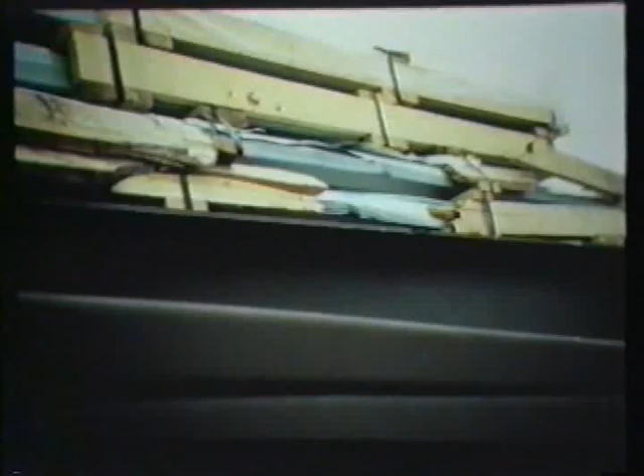...will indicate the materials were received in a satisfactory condition. If there is concealed damage, save the damaged articles, including all packing material. Notify the delivering carrier immediately. Double-check each load. Finding that materials are missing or damaged once erection is underway is a costly proposition.

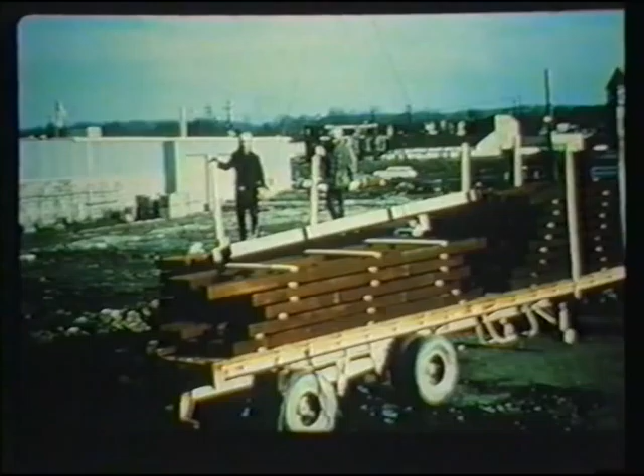Unloading materials is the first step in the actual erection of the building. Always have the proper equipment on hand when unloading. The site conditions, space to maneuver, nature of the materials to be unloaded, and other related factors will determine the type of equipment best suited to the situation. Ordinarily, unloading is done by cranes. Under the right circumstances, however, forklifts may be more practical and economical.

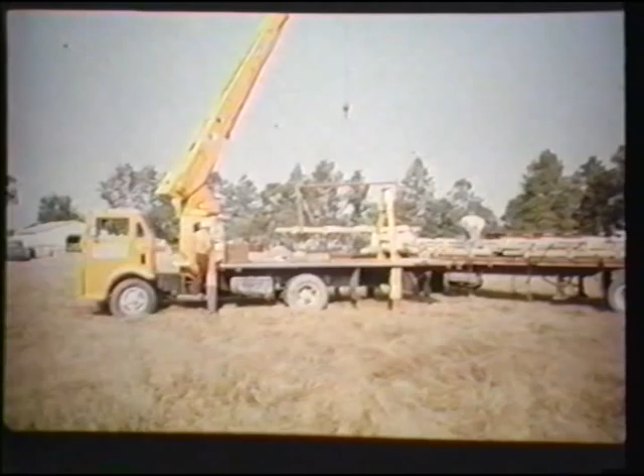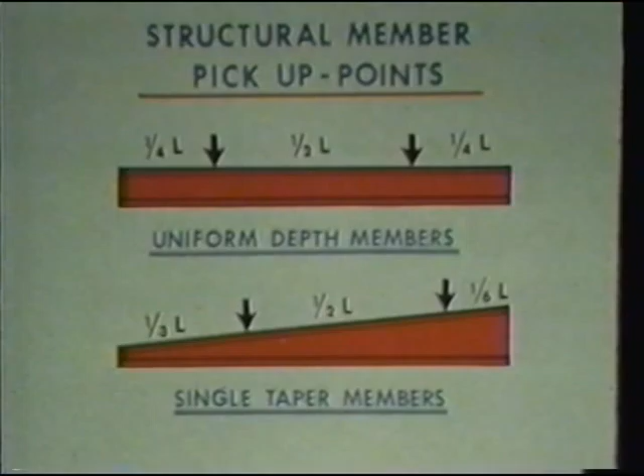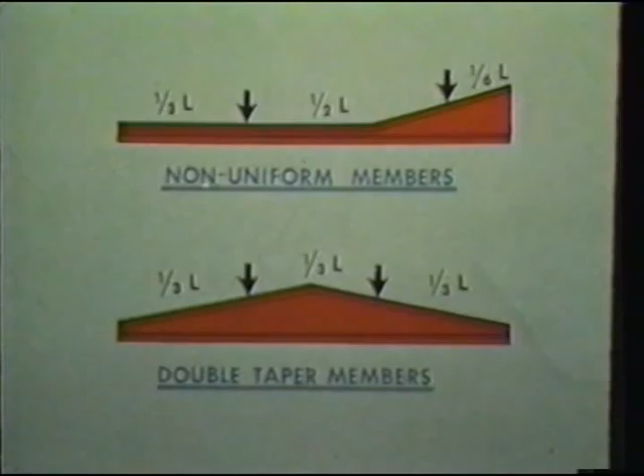One piece of equipment essential to unloading sheeting is the spreader bar. With either a forklift or crane, the spreader bar reduces the possibility of buckling long sheets as they are being lifted. When lifting sheeting, pickup points should also be protected so that the edges of the panels won't be damaged. Chokers, slings, clamps, or shakeout hooks are normally used to unload primary and secondary structural steel. The unloading equipment should be positioned at the pickup or balance points of the load to be hoisted. The weight and shape of the load determines pickup points.

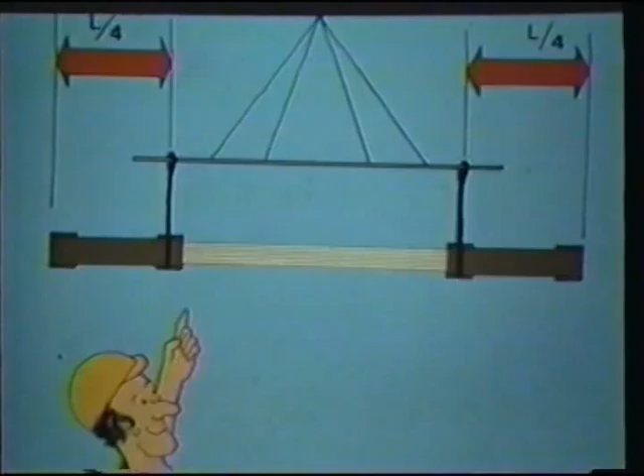Never pick up a panel bundle at its extreme ends. This can severely damage the major panel ribs. A belt or protected edge should be used to avoid damaging the panels. Always pick up panel bundles at the designated pickup points and position the slings around the sideboards. Remember, damaged parts cause delays. Unload all materials carefully. Do not drop, but rather lower them slowly to the ground.

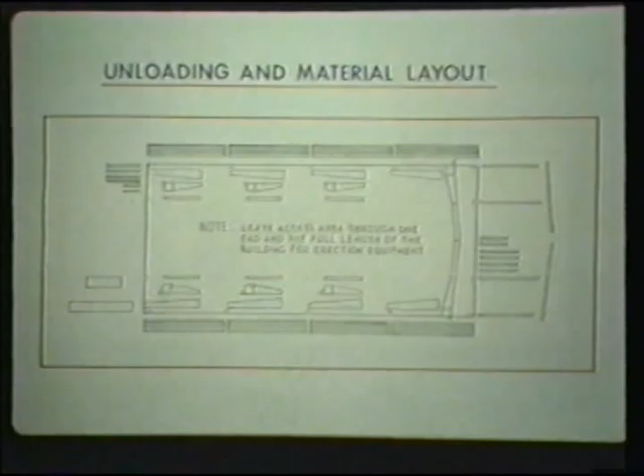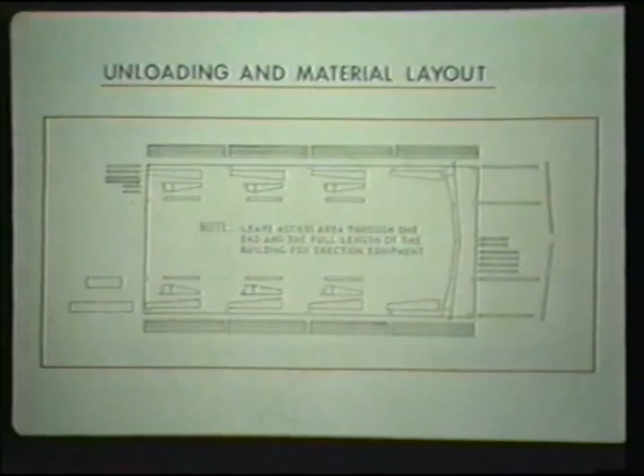A good job of planning the unloading sequence and material layout scheme will eliminate extra crane moves, extra handling of material, much wasted time, and possible damage to material. Give the crew a sketch of the placement locations and/or storage areas for the structural members, panel, trim, bolts, hardware, and insulation prior to unloading. There are two basic unloading techniques. One is unload and store. The other is unload and erect.

If the erection process is going to be delayed, building materials must be properly stored so that they won't be damaged. Ground storage structural components are subject to moisture and dirt. Since structural steel is usually primed with only a shop coat, it might have to be cleaned and repainted at great cost. All materials should be placed on blocks. This will also help assembling materials and attaching them to lifting apparatus.

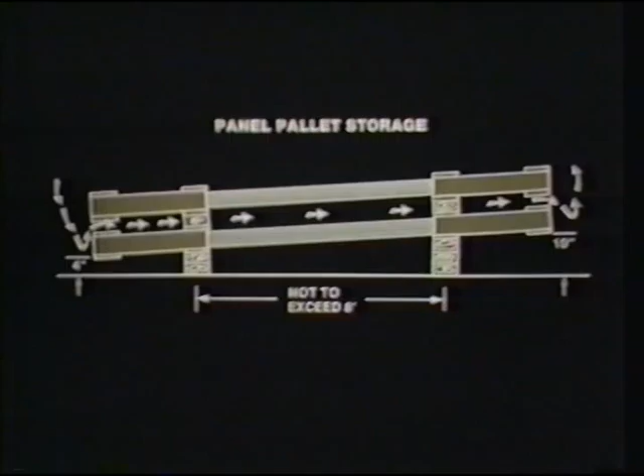Even greater care must be taken to protect sheeting and trim that are stored. When storing sheeting, one end of the bundle should be elevated at least 3 to 4 inches off the ground. Sheet bundles should be placed above the terrain so that air can circulate from both ends. Proper storage does not ensure moisture prevention alone. Inspection and appropriate action is the best insurance to avoid damage from moisture corrosion.

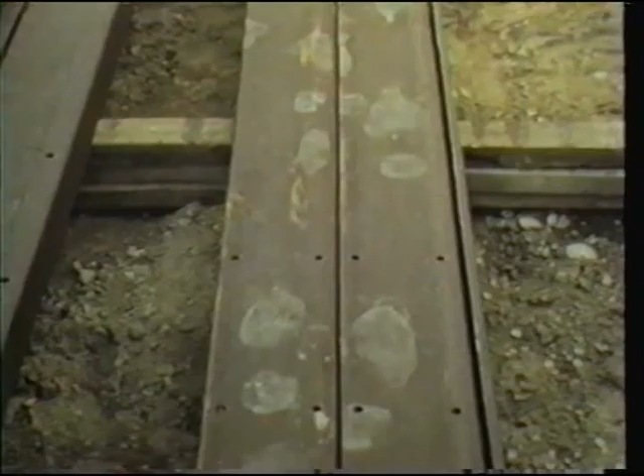Care must be taken when storing and handling insulation materials so that the facing doesn't become damaged and the fibers begin to deteriorate. Keep the material packaged and covered with a tarp until it is erected. No one should be allowed to walk on material stored on the ground. Time spent cleaning soiled materials could be better spent on erection.

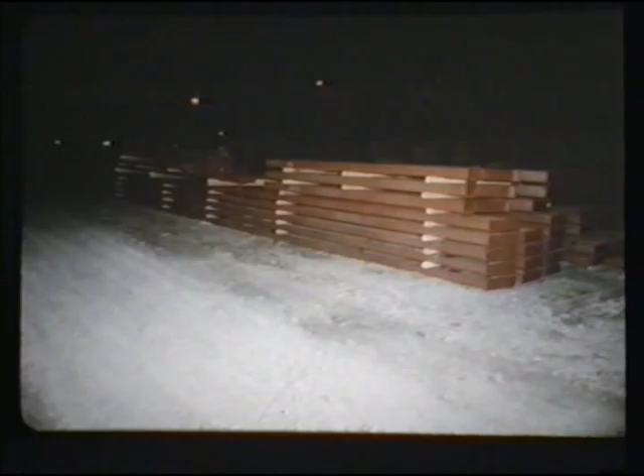Job site theft is costly and irritating. Small tools, erection materials, and hardware should be locked up when they aren't being used in a field warehouse or storage vehicle. Larger items can be protected within a lighted area. A watchman might also be inexpensive insurance.

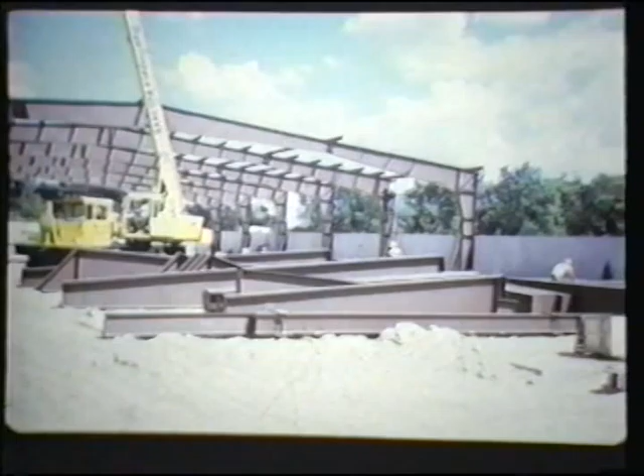If the erection of the building is to start immediately after unloading, the primary structural steel should be laid out for easy pre-assembly and setting. When possible, leave an access area throughout the full length of the building so material will not have to be handled more than once. Many erectors know that a man on the ground can work twice as efficiently as a man working in the air.

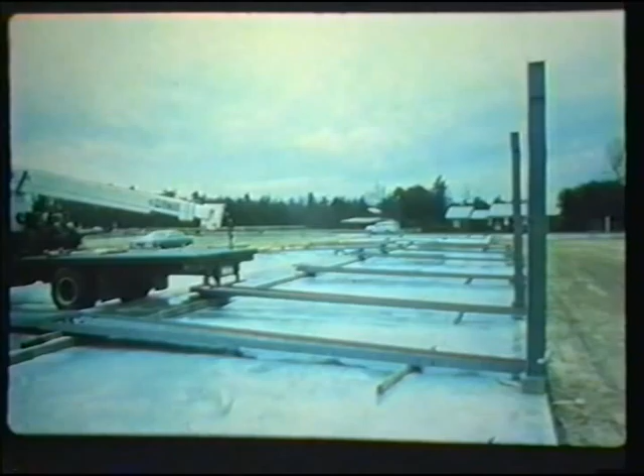It will help the builder if he can assemble as many components as possible that can be handled safely while they are on the ground. For a relatively small structure, the builder may want to erect it immediately upon unloading with a minimum amount of pre-assembly.

This can minimize the amount of time a rented crane is needed on the job. It may be cheaper on smaller jobs to assemble smaller parts after rather than before the erection of the primary structurals.

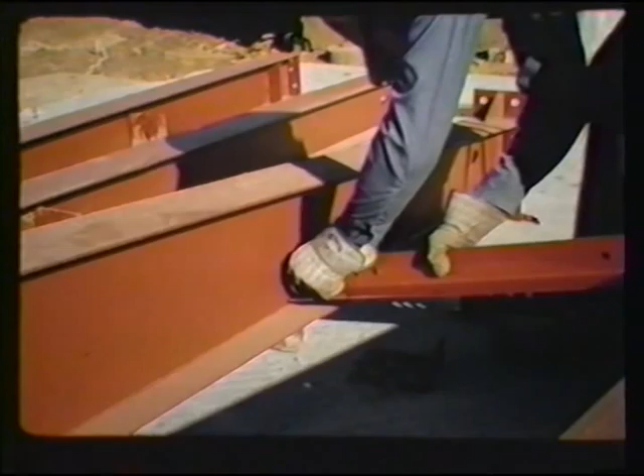Pre-assemble everything possible on the ground. Ground pre-assembly is safer and takes a lot less of the crew's energy. Columns can be pre-assembled with clips, brace angles, and other miscellaneous connections. The builder will have to decide on how much pre-assembling can be done depending on the size and type of job. Rafter sections can be bolted up as they are laid out for picking.

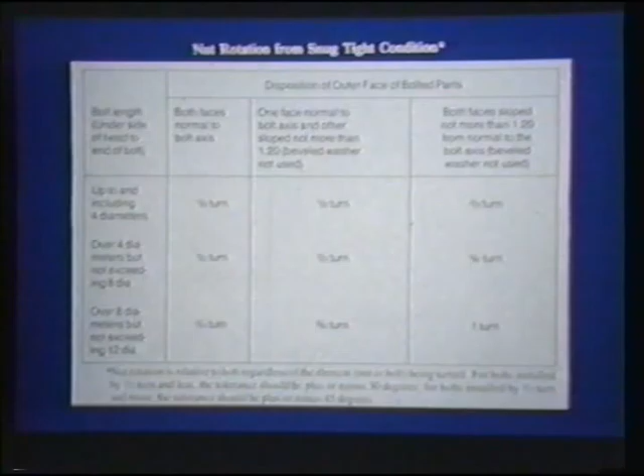All splice bolts should be installed and tightened under unstrained conditions. Make sure all pre-installed high-strength splice bolts are properly tightened before the structural sections are hoisted. Connection bolts for miscellaneous materials need only be finger tightened in pre-assembly. All bolts, however, should be fully tightened upon completion of each connection. Always follow the manufacturer's specification for bolt tightening.

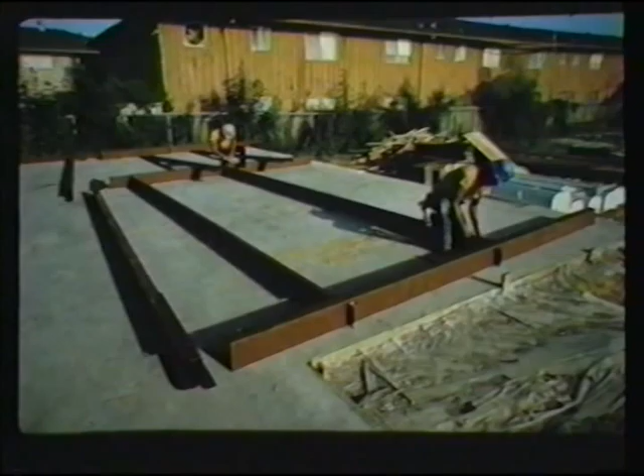Flange brace angles also can be loosely bolted to the rafter sections while they are on the ground. Post and beam end wall materials can be laid out at each end of the building. They can be fully or partially pre-assembled for tilting up into place as a unit or unit sections.

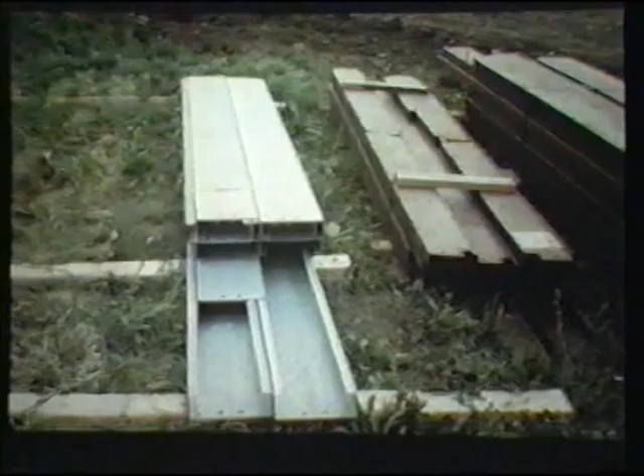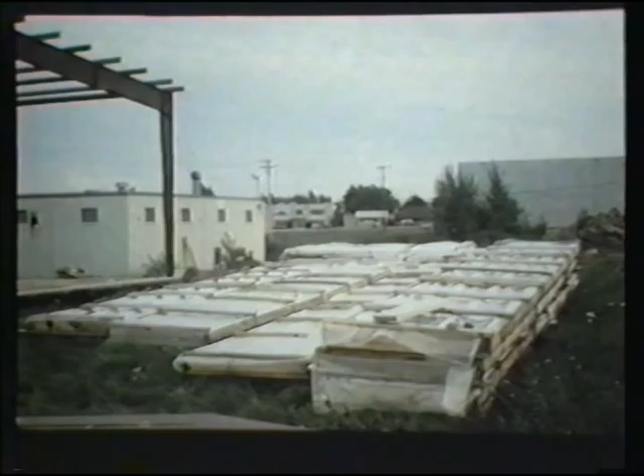Girts, purlins, eave struts, and door jambs should be broken out and divided along both sides of the building according to the requirements of each bay and rebundled if necessary for handling. Panel bundles, trim, and related components should be spotted outside the foundation perimeter for erection later. Shake out wall and roof rods in their respective bays. Run the nuts down, then back them off to clean the rod threads. Pre-assembling nuts, bolts, and washers can also save time later.

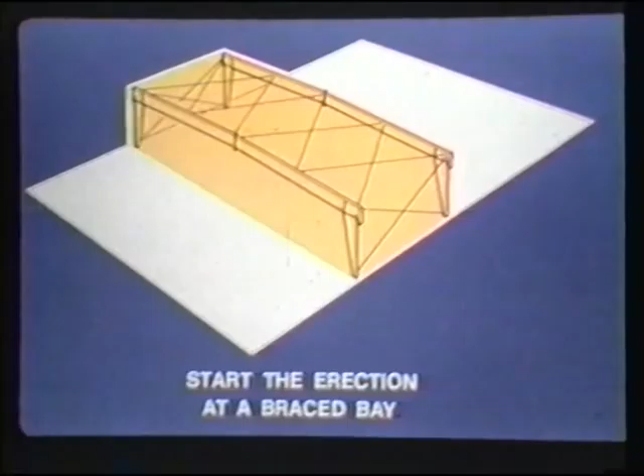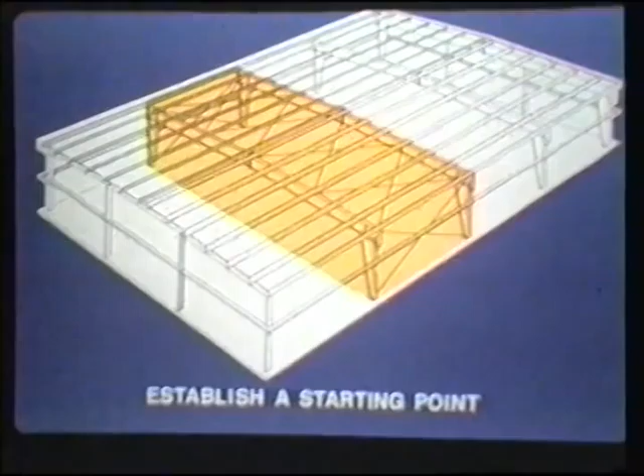Structural steel, Section 5. Safe and efficient structural steel erection begins with the first braced bay. MBMA strongly suggests that when possible, the first bay be completed from sidewall to sidewall before erection continues on the remaining framework, except for extremely wide buildings or where impractical. That includes primary frames, purlins, and eave struts, and loosened permanent rod bracing.

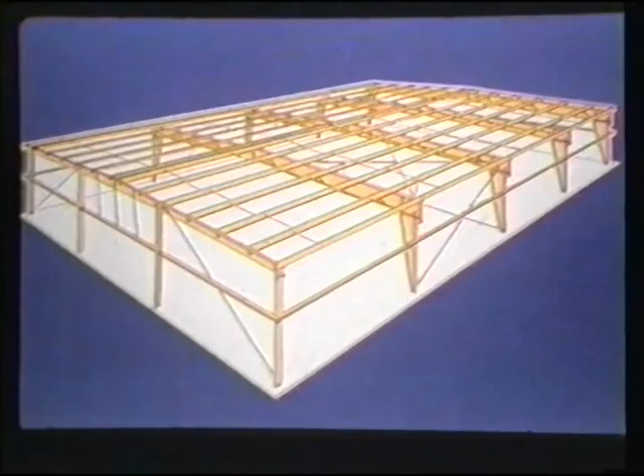The framework should be adequately braced with properly anchored construction tie-offs. Further, it is mandatory that the builder adequately stabilize all erected components until the entire structural shell, including the sheeting, is complete. Nearly all construction phase failures can be attributed to inadequate construction bracing.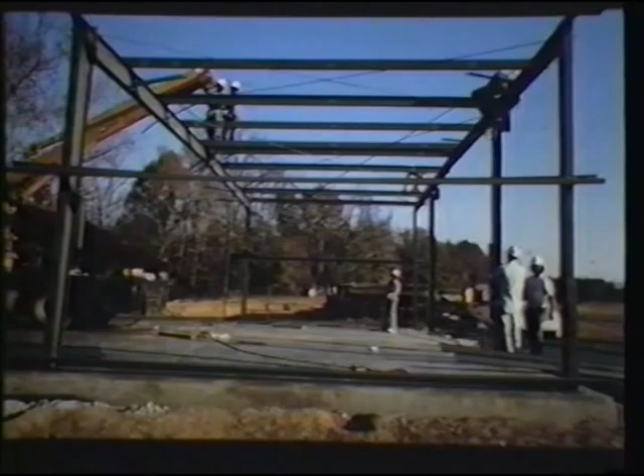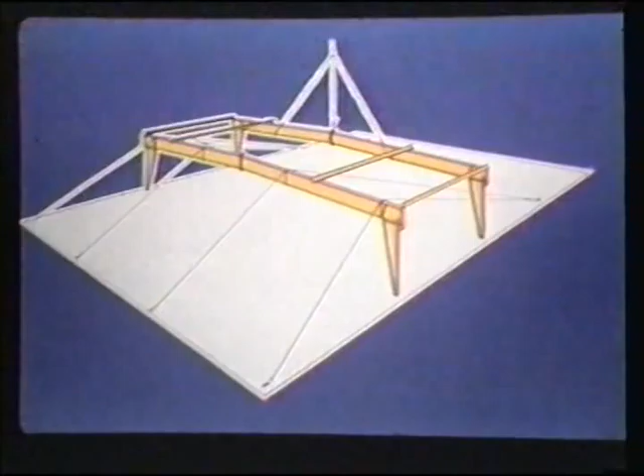Once the frames for the first braced bay are set and cable braced, all of the secondary structurals should be installed. Once the purlins and eave struts are tied in, any permanent roof and wall bracing should be installed in a loosened condition. All temporary construction bracing must still remain in place and tight. Secondary structural connections should not be tightened until the first bay has been plumbed and aligned. Necessary alignment adjustments may be made by tightening or loosening the temporary cable bracing.

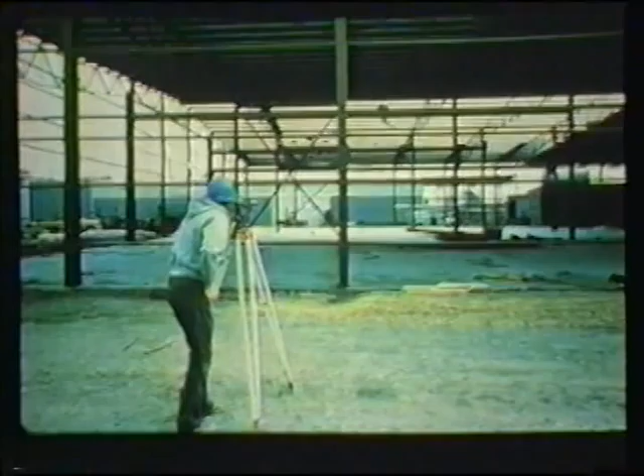After the bay is completely plumbed and aligned, the secondary structural connections may be tightened to specification, along with the permanent rod bracing and the anchor bolts. Permanent rod bracing is not recommended as temporary construction bracing or for purposes of plumbing. The quickest way to align a building is to plumb the first bay erected. Then make periodic alignment checks and adjustments throughout the balance of the structural system based on this benchmark bay. This will make all succeeding connections easier.

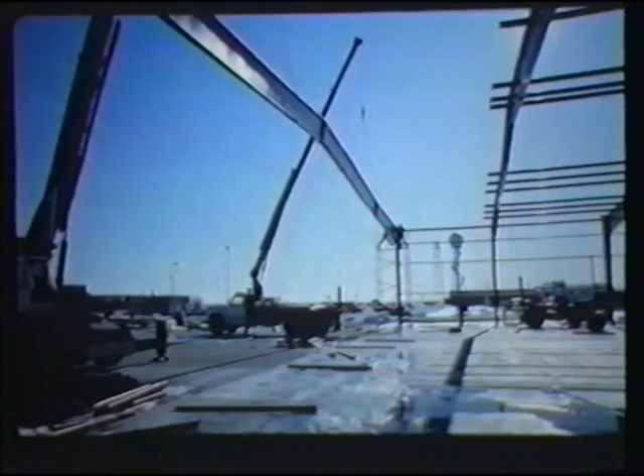Plumb is defined as a variance not to exceed L/300. There are several accepted plumbing methods. Use a transit to achieve the greatest accuracy. After the first braced bay is completed and plumbed, the builder may continue with the erection of the remainder of the structure. Again, the temporary construction bracing should still be in place and tight in the first bay.

MBMA recommends that all purlins be installed as the building progresses. This diagram reviews the initial steps of metal building erection. 1. The first interior frame is set with temporary tie-offs, shown with blue lines, in place. 2. The second frame, in this case the end wall, is fully erected with construction bracing, again shown with blue lines, in place. 3. All of the secondary roof and wall structure is installed.

4. Permanent rod bracing, if required, is loosely installed. 5. The first bay is plumbed and aligned with all connection bolts tight and permanent rod bracing, if any, snugged down. Do not tighten the rods too much. It may not be possible to pull all the sag out, especially with larger rods.

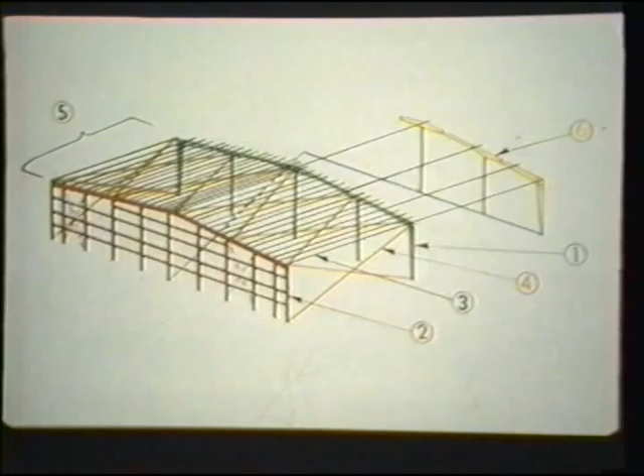6. Erection of succeeding frame lines continues with the same procedures as described before. In order to reduce the number of lateral crane moves, it may be practical to continue with the erection of one half of the structure for the entire length of the building. Then, work back down the opposite side in the same prescribed manner to finish off each frame line. This method is fully acceptable as long as adequate temporary bracing is used throughout the length of your erection path.

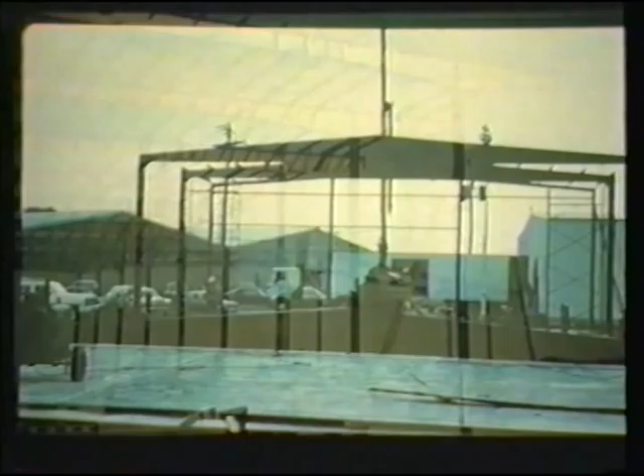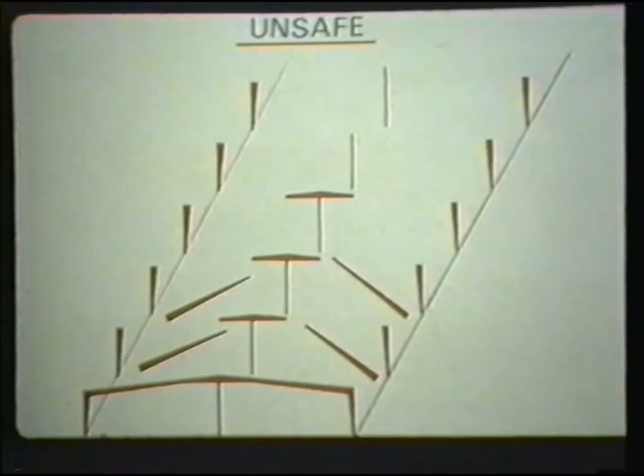Once the first bay is erected, braced, plumbed, and bolted up, it becomes the basis for erecting the remaining frames. Set all columns you can reach without moving the crane, but only for those frames which can be completed or braced during the current day's work. Freestanding columns are hazardous since they can be blown over by a gust of wind. Put washers and nuts on the anchor bolts, but do not yet tighten more than finger tight.

If 2 cranes are needed for erection, it is suggested to have one at the site ahead of the other to shake out the material. If 2 crews are required, the second crew can be kept busy by following up the main erection sequence with the distribution and bolt-up of fill-in materials.

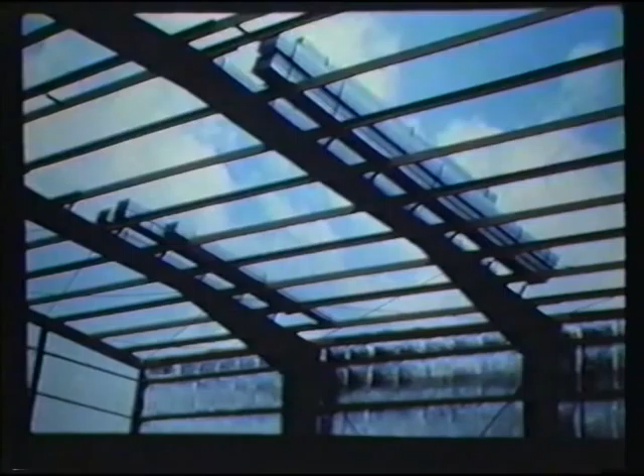When all purlins are filled in as erection of the frame lines progresses, the roof bundles can be spotted above the framework, if the roof slope permits, normally under 2 and 12. This can save valuable time during sheeting erection. It also reduces the crane time. A wide multi-span frame structure will require additional men to follow up the main erection sequence with the installation and bolt-up of fill-in materials in order to keep pace with the main framing.

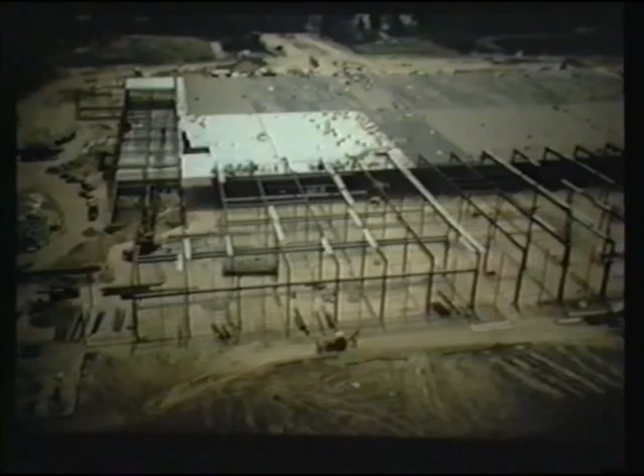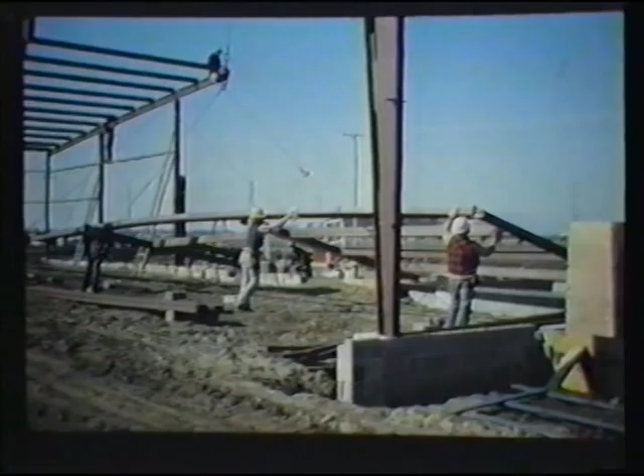Also, if roof slope permits, plan to spot the roof panel bundles as structural steel erection continues. The crane may not have enough reach to properly place the bundles later. When placing roof panel bundles on the structure, make sure they are spotted over the primary rafter sections with purlins blocked to avoid structural damage to the unbraced light gauge purlin members. These operations should be repeated over the entire length of the building. The remaining end wall is raised by the methods described earlier.

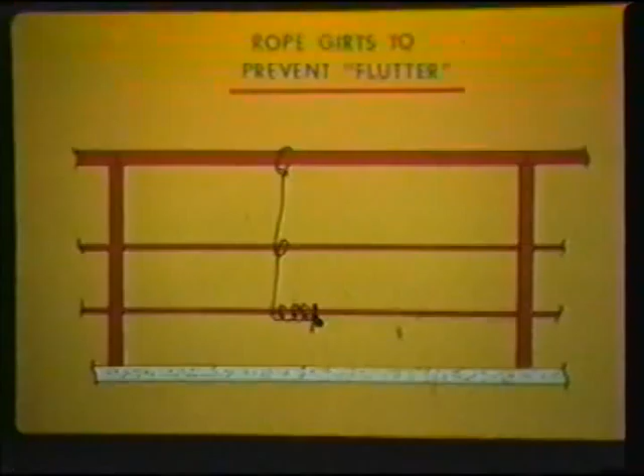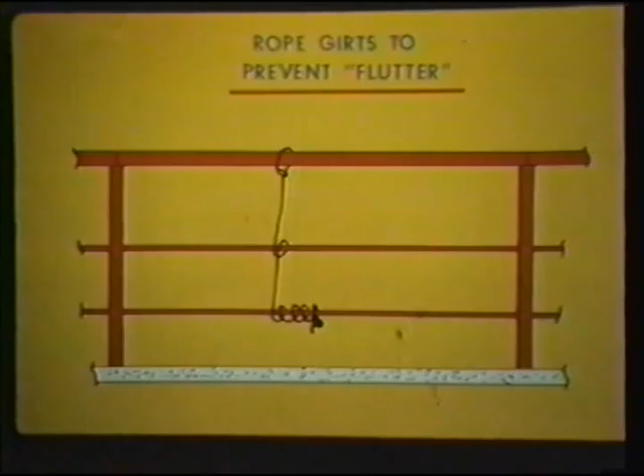If for some reason the wall can't be sheeted immediately after the girts are erected, girt flutter may be averted by blocking or by looping a continuous length of rope around the eave strut or end rafter and to each girt, and then secured. Walking or climbing on girts or girt clips also introduces severe stresses. The repair of carelessly damaged material is always more costly than measures of prevention.

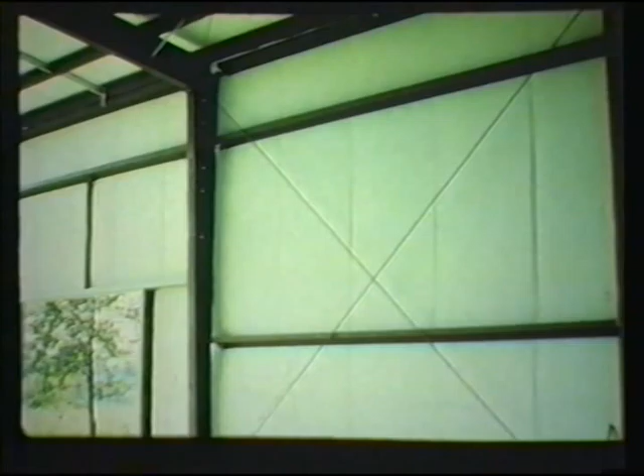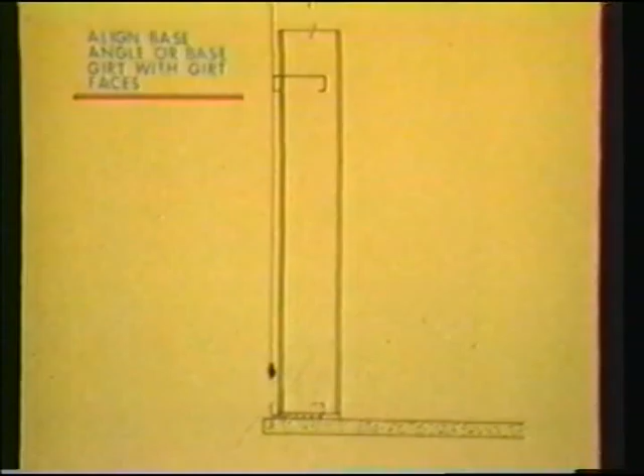Prior to installation, plan the positioning for each girt line in order to properly accommodate the framed openings. If a girt line must be changed to accommodate framed openings, try to maintain this positioning throughout the length of the visible wall plane. This helps avoid erratic screw lines and stripped-out screw holes in the sheets. It is important to align the face of the base condition with the outside faces of the girt system to ensure proper alignment of the base for the wall sheets. This can be easily accomplished with a plumb line.